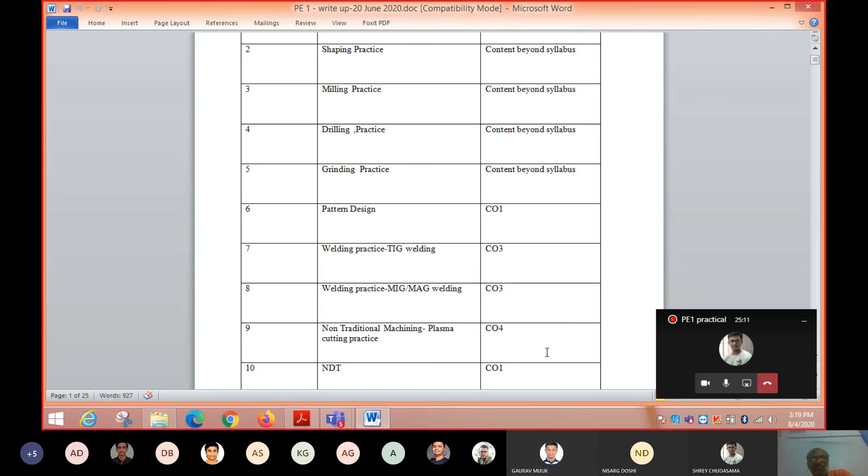In non-traditional machining, we have a plasma cutting machine in our welding shop. They are in good condition. Yesterday only that professor, Fernandez sir, went to that lab, checked, and told us that everything is in good condition. Let's hope, let's wait for the opening of the college. If it doesn't open, we have an alternative.

But at present, we have made it for 5 assignments. I personally made it and given it to all the batches.

On the same line, this write-up, you have to see what happens is the same write-up you will use for writing also. You need not make any other journal pages. Only what you can do is add one cover page, write your name, roll number, batch, subject, and the last one, your teaching faculty or instructor name. In your case it will be my name. So that will be your cover page.

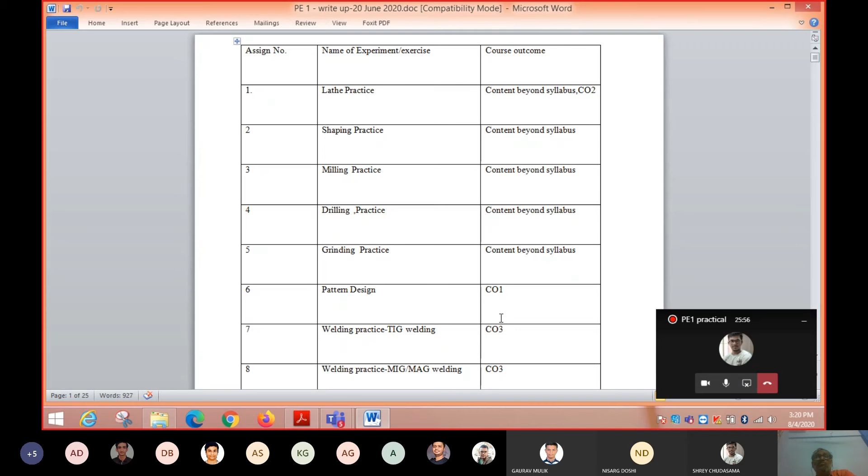Now this is the list of experiments, and then you are starting with lathe machine tool exercise, which is the first one, which we are going to cover extensively today. Now the first question is, label the parts of the below shown center lathe.

Okay, so this is the center lathe, this lathe machine. This is the head stock, tail stock. This is the chuck portion. This is the leg of the machine.

Here you have to write the name in your handwriting. You have to write the name: leg, head stock, like that. This is carriage, you can say this is carriage. Then this is cross slide, which is moving at 90 degrees to the main axis. Then what is this? This is compound rest. This is tool post, it's like that you have to write here. This is tail stock.

Lead screw, feed rod or feed screw, so like that. This is carriage, okay. Then this is the feed unit. This is known as the bed, the lathe bed, like that you can see that.

So now we will show you in our presentation, the write-up is different. This is your journal actually. You have to give directly the names here. You need not draw the lathe machine.

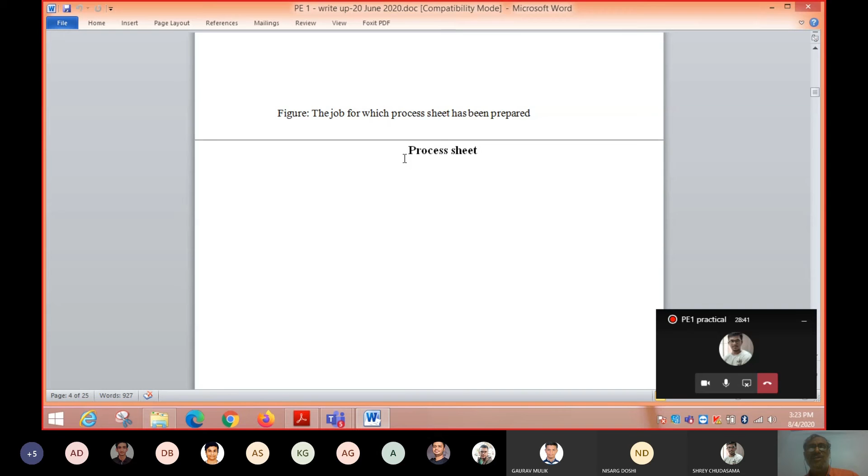All the teachers from all your batches will decide. Then comes part C of the first experiment, that is workshop exercise and demonstration.

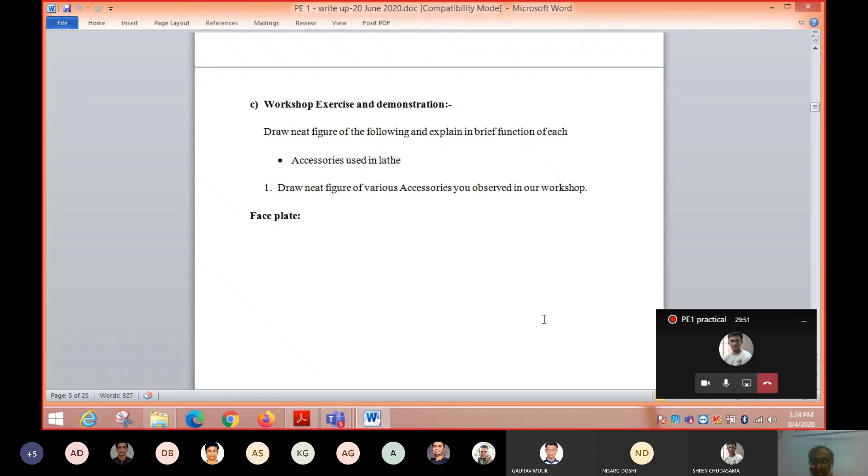Face plate, this is one, you have to draw the figure of face plate here. Draw face plate here, write one or two lines and draw face plate. You need not write the statement, you can directly draw because the space given is according to that figure. So here you draw the figure of face plate.

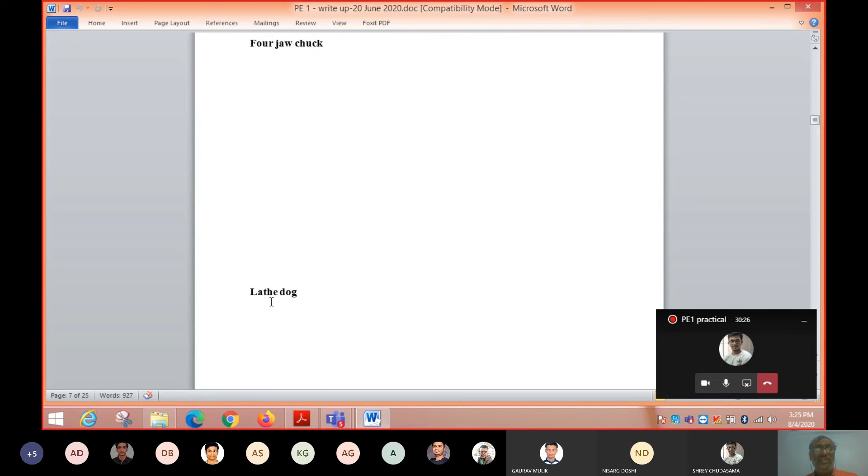Then 3 jaw chuck, here you draw. 4 jaw chuck, here you draw. Lathe dog, this is one clamping element, so here you draw that figure. Steady rest, here you draw, and follower rest, here you draw.

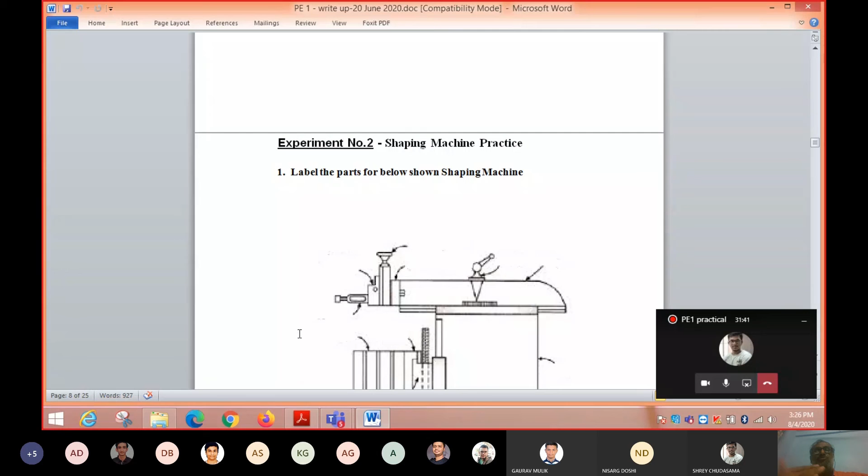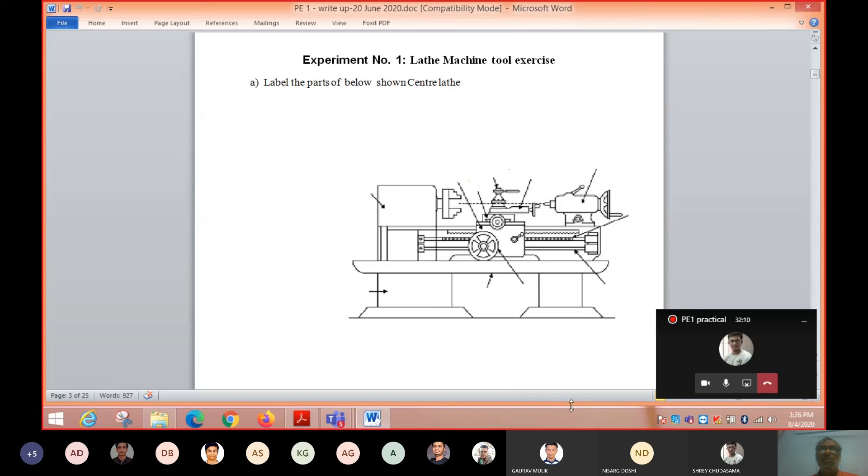तो हम लोग पहले में एक बार फिर से रिपीट करेंगे, आज हम पहले के ऊपर ही कंसंट्रेशन करने वाले हैं। This first experiment is lathe machine tool exercise. We have drawn one figure of lathe front view and you have to just name it, label the important part which is shown by arrow.

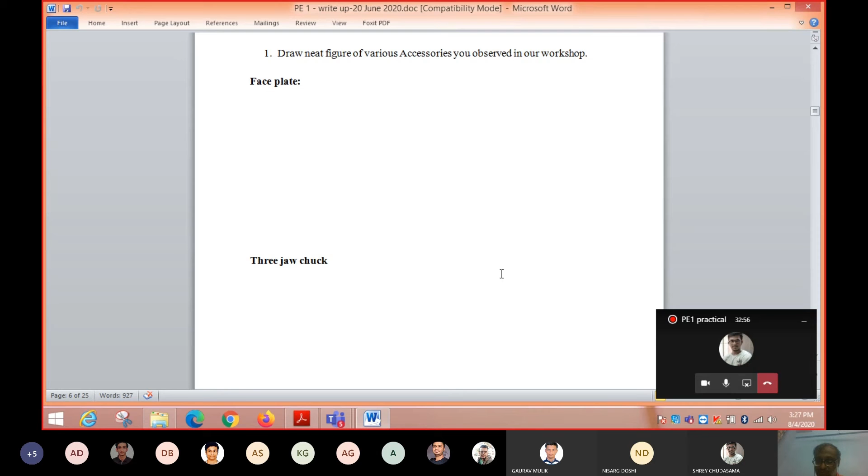Now, just a minute, I will go to my D drive where all the slides I have kept.

The name was presentation 1, machining processes.

Various operations are done on the lathe machine, for example turning. In turning, the job is rotating and the tool is kept in touch with the job, some depth of cut is given, and the tool is given forward motion. As the tool moves forward while the job rotates, due to that relative motion, cutting force is applied by the tool on the workpiece, chips are formed, and the workpiece gets cut.

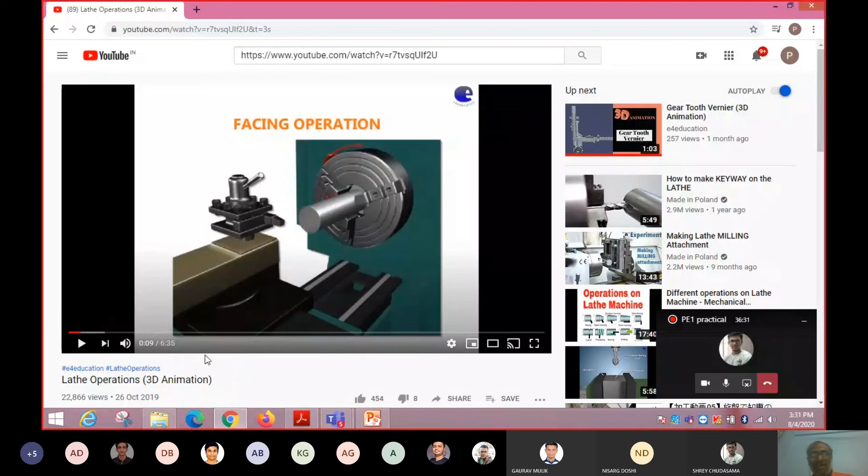You can see this. Now tell me, are you able to see this? Yes sir, but whatever is spoken there, you cannot listen to it. No, that's a YouTube video and they are telling about the machinery, but you cannot hear it. No, I'm just checking. You cannot listen? No, you can only see it, sir. So now, what is this? Let it run through the various operations, I will explain.

Watch this, the various operations. This is the job which is held on the live side. This instrument is known as a chuck, a three-jaw chuck. See how this is rotating.

Now this is the job, clamping on the live side, and this is a tool in the tool post. This is a four-way tool post, called that because it has four sides. This is the cutting tool, and at present it is doing facing operation.

What is it doing? Facing operation. In facing operation, this tool is moved 90 degrees to the workpiece axis. When the workpiece rotates, the tool moves at 90 degrees, and the face is cut, reducing the job's length.

You can see this now. I'll go back. See what is happening, this is facing operation where the length is reduced.

Now we will go to other operations that will further explain. This is the chuck, again this is the job, and this is your tool. Here the description is also written.

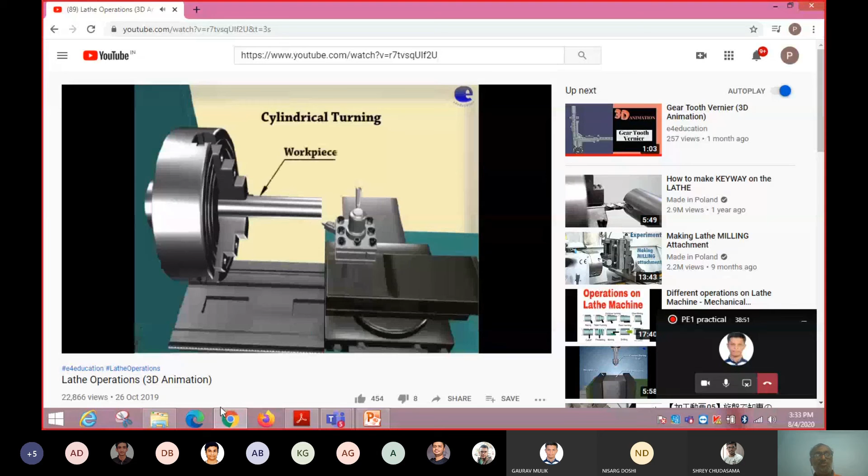See what happens in turning. The feed is given in this direction, the chips are removed, this is turning, and the tool is moving in this direction, with this much depth of cut applied.

So again I will show you. A slight depth of cut is applied, not exactly at the periphery. We will take it a bit forward and rotate it like this, and the job will rotate. So there is a relative motion between this tool and this job: rotary motion of the job and feed motion of the tool.

So turning will take place. What happens in turning is the diameter gets reduced, while in facing the length gets reduced. In turning, diameter gets reduced. So turning and facing are the basic operations of our lathe machine.

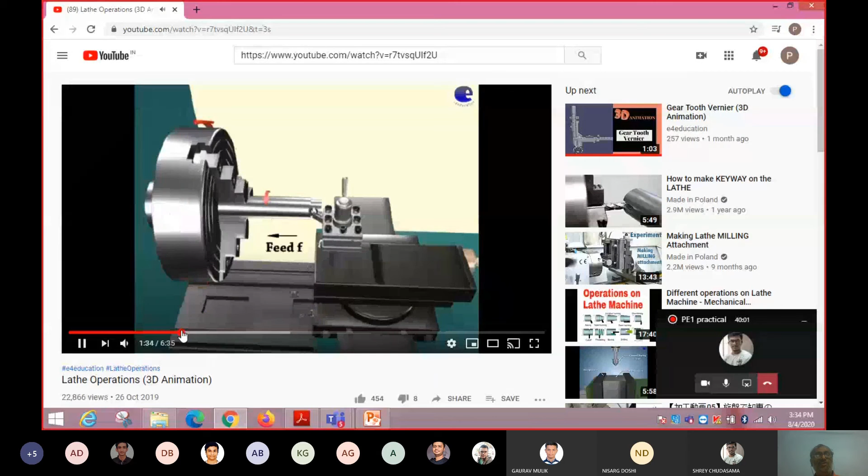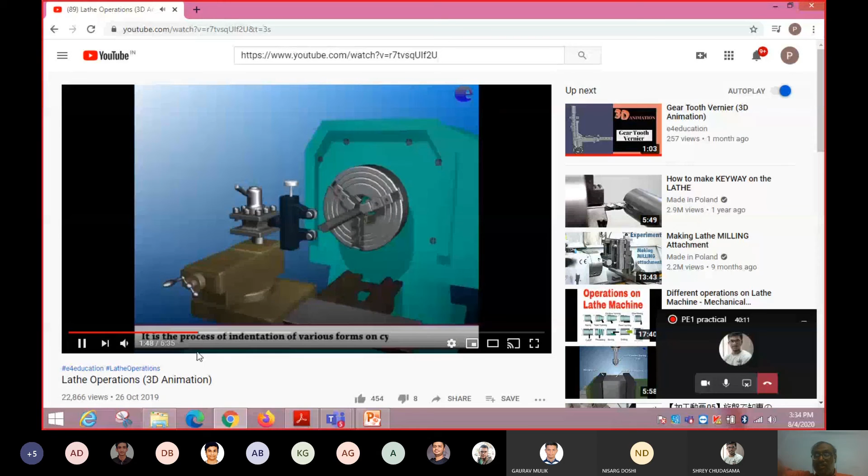Very basic operations. Now other operations. This is knurling operation. Knurling is when, like on dumbbells where for gripping you need a criss-cross structure, that is known as knurling, and that knurling is done here.

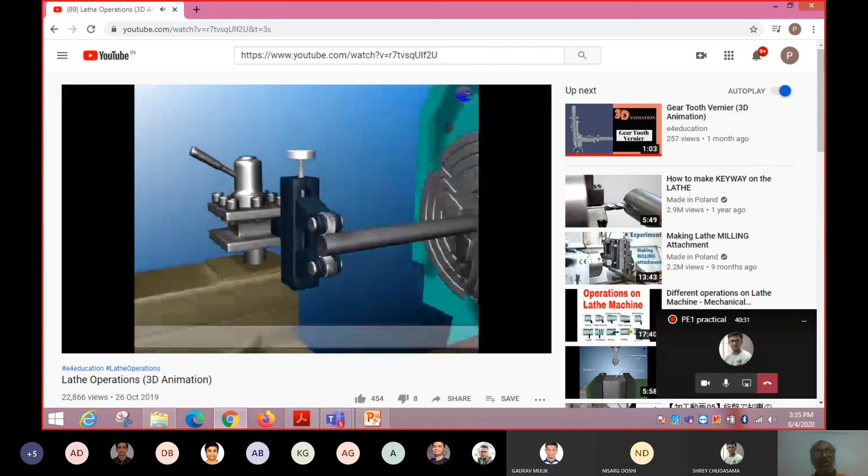Knurling tools are cylindrical with criss-cross patterns, pressed against the periphery of the cylindrical rod, leaving that impression on the workpiece, which is the knurling operation. Later I will specially show you how knurling operation actually works. Some videos here show it schematically, but it's not so prominent.

Whatever impression is here, that criss-cross pattern is now clearly visible. When you apply this, it creates a gripping type surface. This portion is known as knurling. This means if your job has a handle that needs to be gripped, then this knurling operation is done on it. We will go to some other operations ahead.

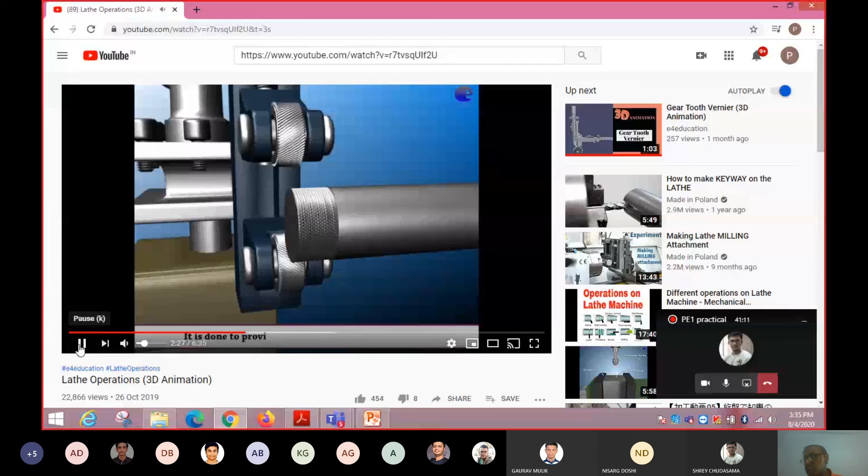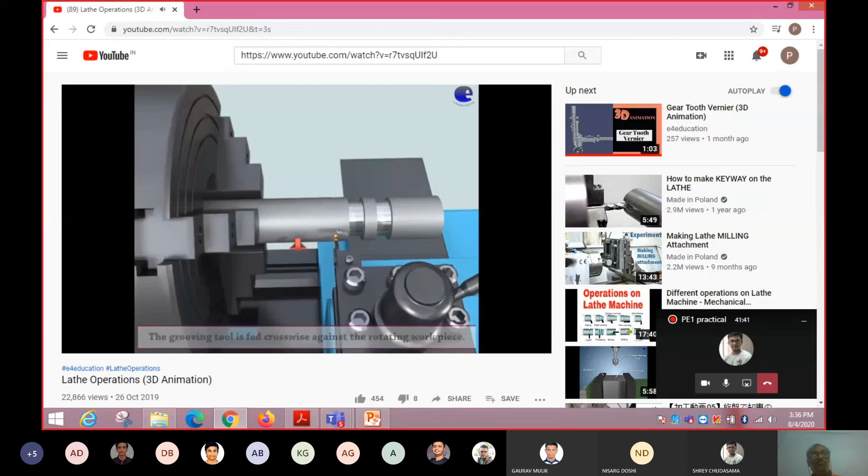Grooving is needed in between, and that groove will be created by a grooving tool. In grooving, much of the area of your tool comes in contact with the workpiece. So you have to keep the rotary speed slightly lesser, otherwise the tool will break, since sudden force will come and more area will be exposed. This is grooving.

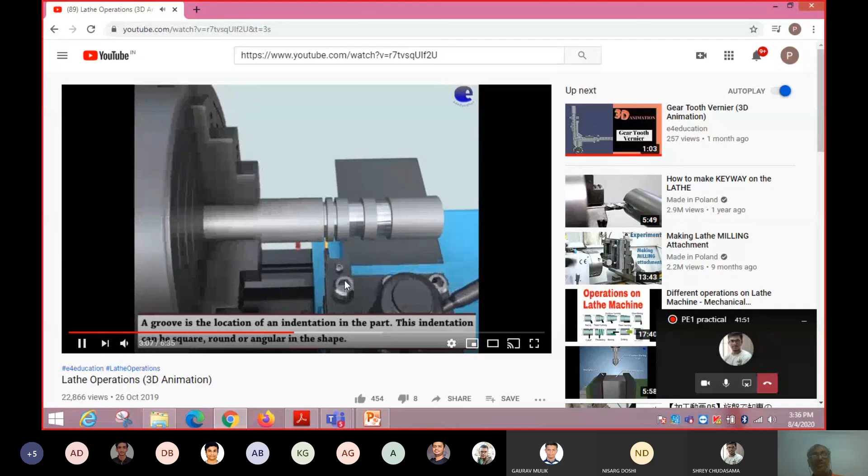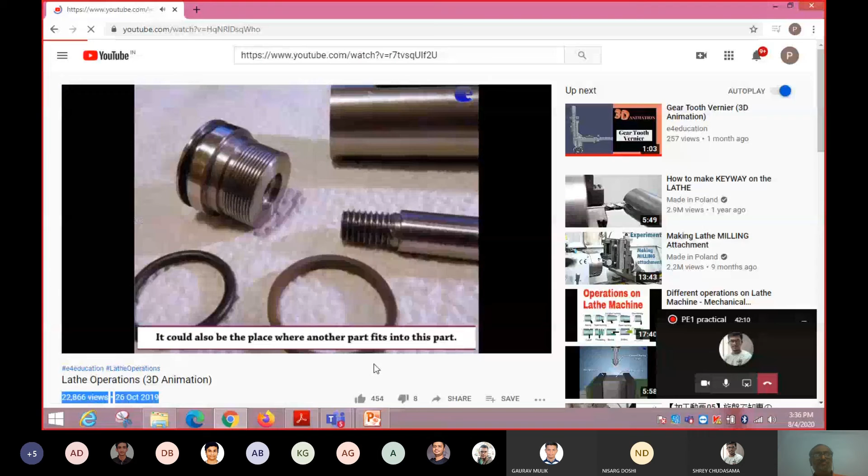Various operations are there that we are observing. Here the function of the groove is also shown. These videos you can see later on also, I am going to give you the slide later on. So this is over.

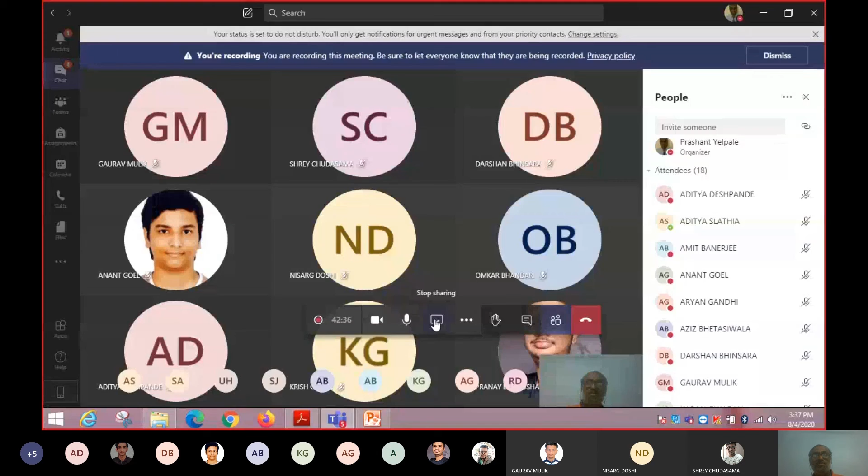So we will show some other now, we were studying this. Are you able to see this? Anybody, full screen or not? Can you able to see this? Now you can see this, no? Yes sir, so this slide we have shown.

Now the same operations what we have studied: facing operation, where the length gets reduced. In turning operation, your diameter gets reduced. Then this is taper turning.

If you want a 30-degree angle, you move the tool at 15 degree using the compound slide. When it is tilted, there are graduations and a protractor there. The zero of the compound slide initially matches the zero of the graduation during parallel turning. But when you turn the compound slide, if you want a 30-degree angle, you turn the compound slide by 15 degree, so the diametrical effect will be 30 degree. The job will rotate as usual, and the tool will move 15 degree in this direction, so you get 30 degree totally. Similarly, whatever angle you want, just half of that you have to turn using the compound slide.

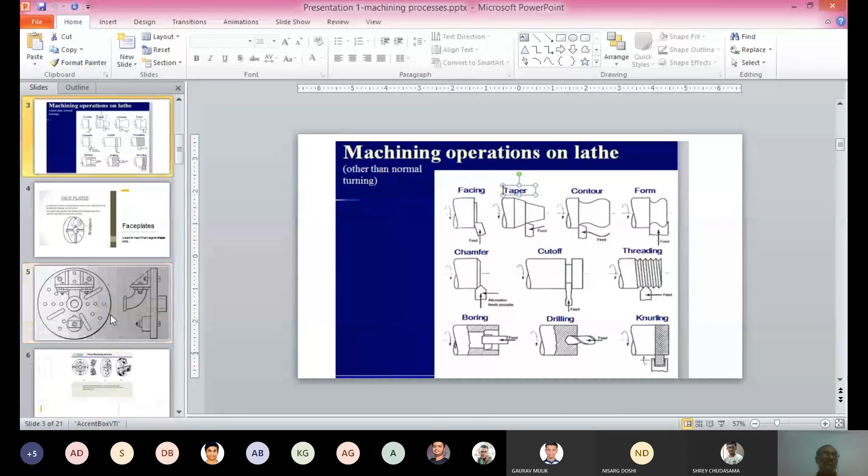Okay, now we will see this faceplate. Just read what is shown here on the faceplate. Instead of chuck we are using faceplate for live center. Aapne three jaw chuck, four jaw chuck dekha hai. Just now in that video there was a three jaw chuck. Now remove the chuck and you can have a faceplate.

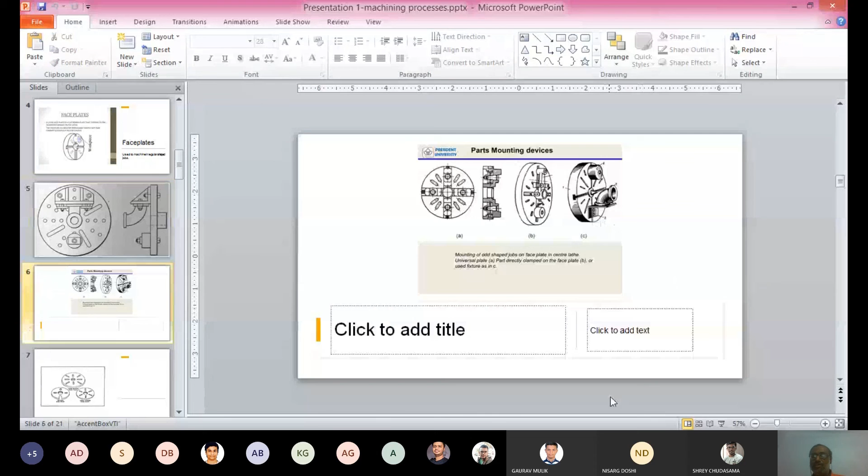You can see here part mounting devices etc. They are shown. Sorry, here I can show slightly - I can make it slightly bigger for you. Oh no, ye bahut hi bada ho gaya. You can see this, thoda sa aur bada karta hoon aapke liye. No, zyada hi bada ho gaya. Haan, ye ab...

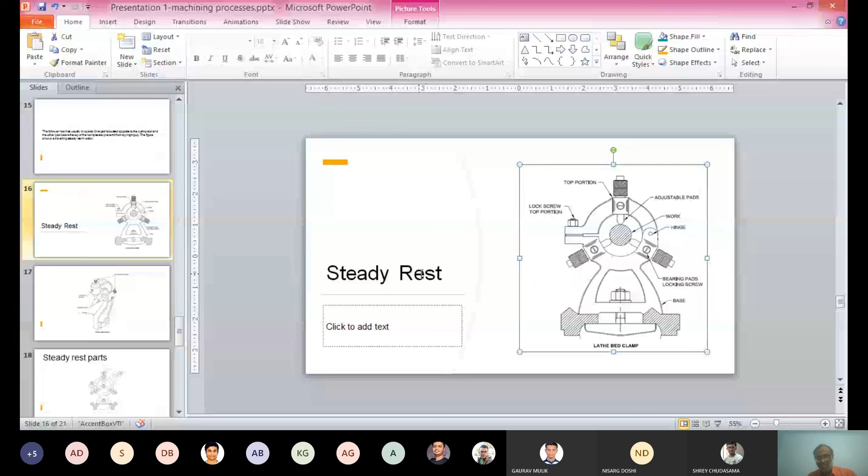If you rotate this, it can move like this, this, this - so it gives good support to your job. So this is steady rest, because it is fixed at one position. However, another one is follower rest. Steady rest and follower rest are used to support long components or long jobs - the bending is reduced, vibration is reduced.

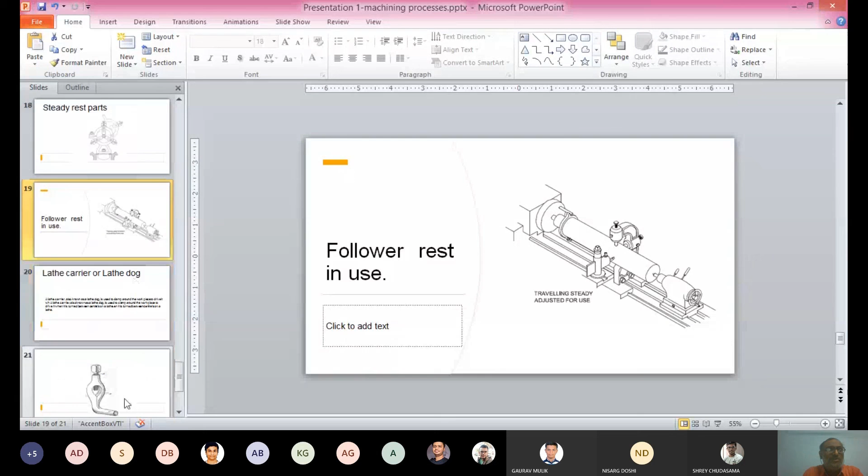So let us see - this is your steady rest, this is follower rest. I have also shown you photos of these.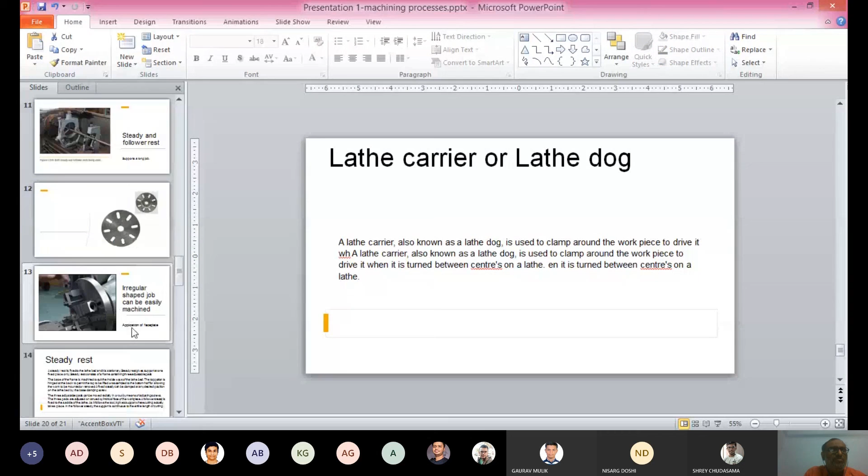Here it's a YouTube search. Let us apply this particular facility - let's see what comes up when we search. Lathe dog in operation - if there is some video, let us see whether it is there.

So, turning between centers with lathe dog - they are showing that.

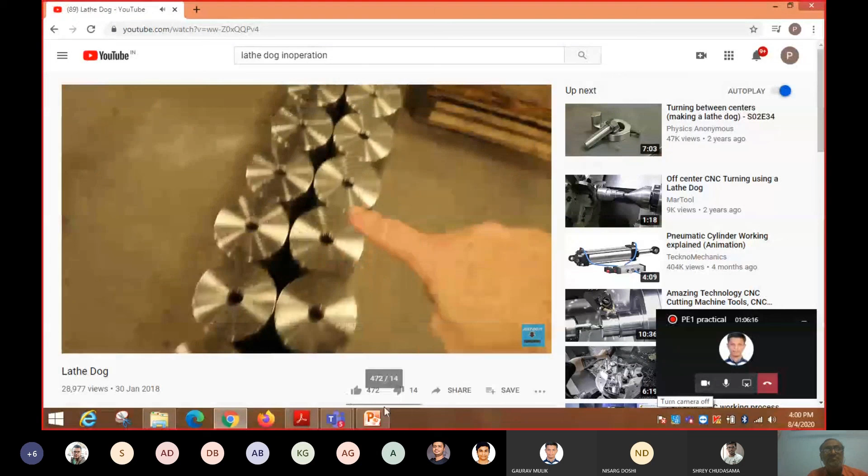See here, lathe dog in operation. So this is a lathe dog, you can see the lathe dog. It is supporting the job, supporting the job, and it is fixed in the machine.

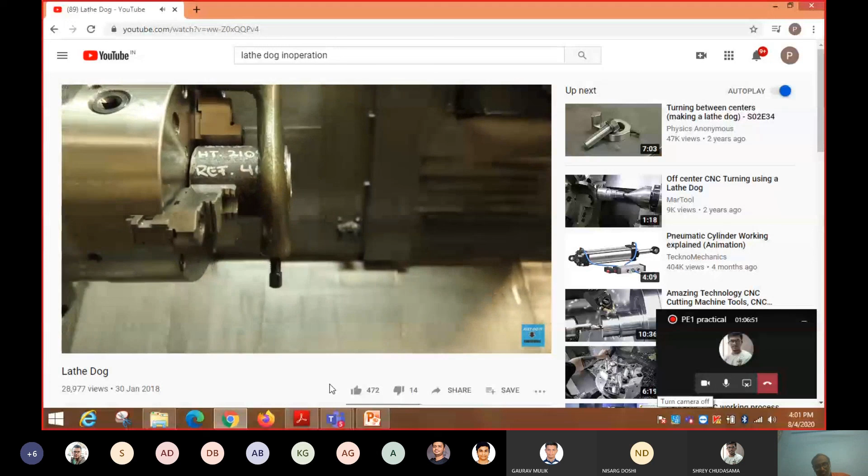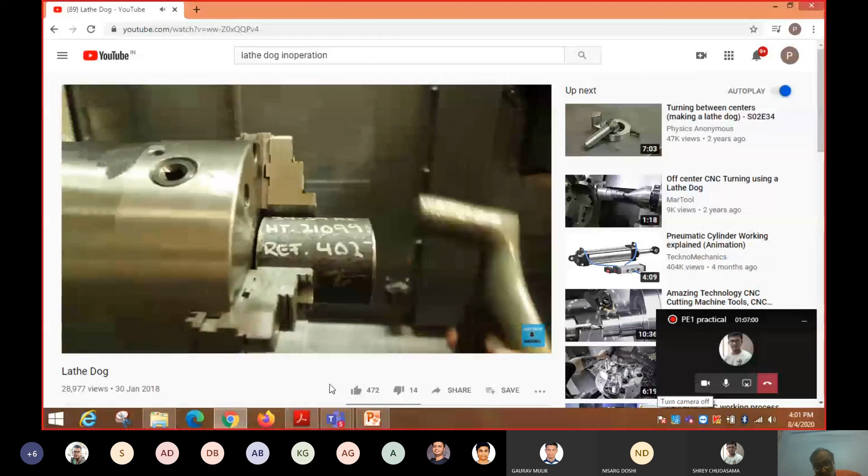Instead of chuck, if there is a faceplate, then in the faceplate hole or slot this portion is fitted, this portion that is fitted in the slot or hole, and this portion holds the workpiece. It's showing very clearly there at the top.

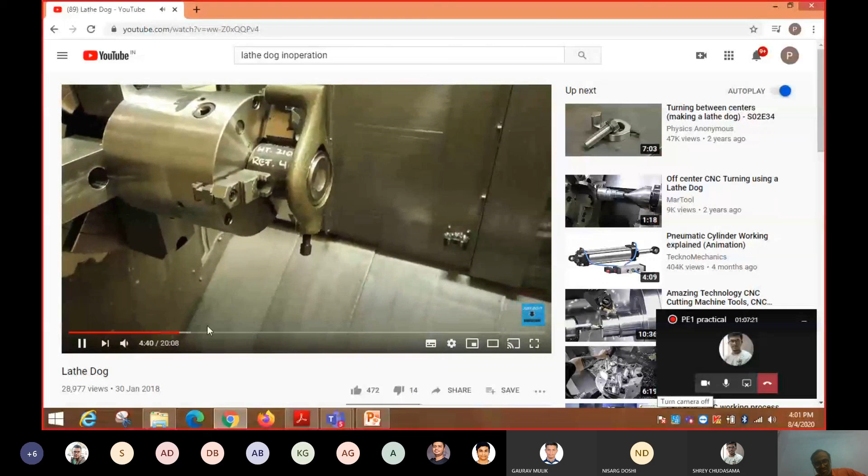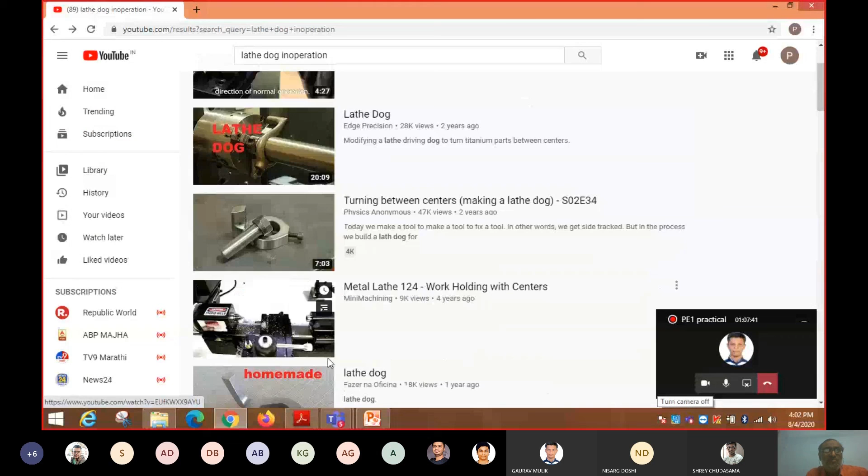What happened suddenly? Net problem. Just searching for the suitable video for you, just a minute.

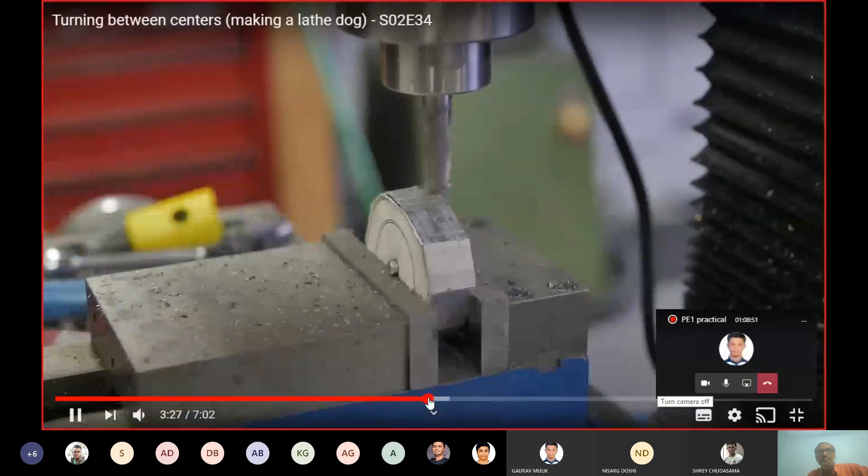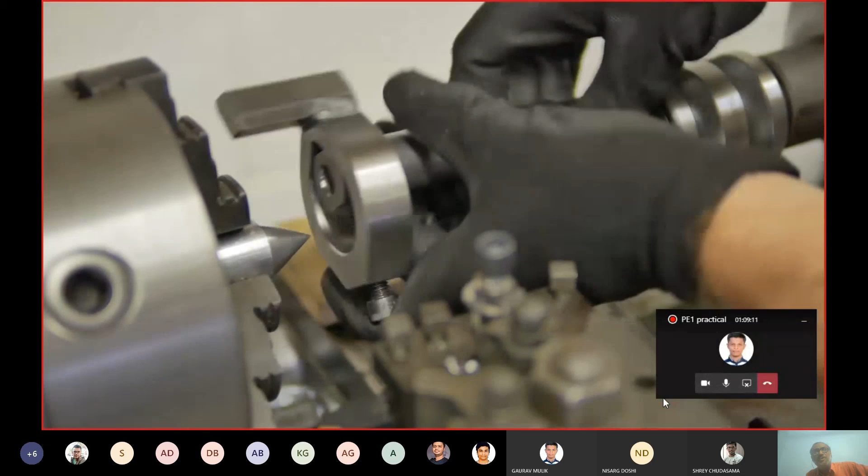They have prepared the lathe dog. So this is that lathe dog, it supports your workpiece.

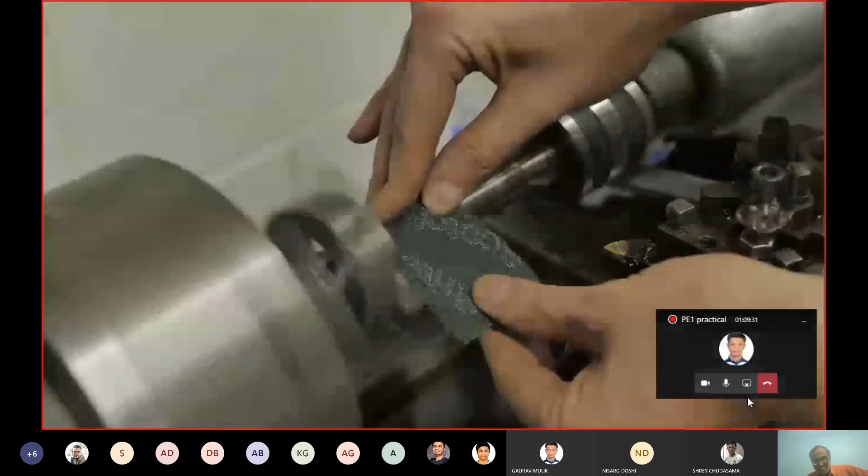So this was about your assignment. I discussed that earlier assignment.

So we will see our regular slides now. So all this steady rest, follow rest, lathe dog. So lathe dog, it is this figure. This portion will go into the face plate, and here this is a portion of the diameter of the workpiece, and here it is for clamping from that side. So this will move here and there as per the job. So this is used to firmly hold the workpiece to the face plate.

For the chuck there is no need, for this the chuck's own force on the job is enough. This is used to hold the workpiece to the face plate. That is more helpful, for that the lathe dog is used. So we have covered lathe dog, then steady rest, follower rest, three jaw chuck, four jaw chuck, and one more I think face plate.

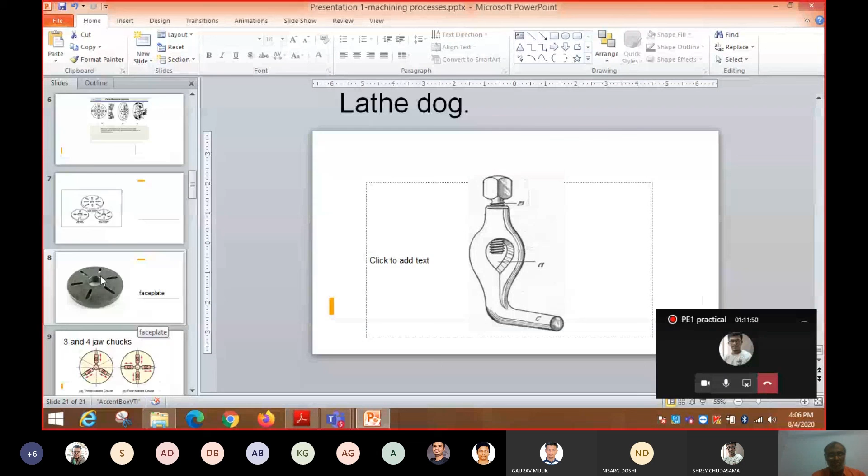Okay, here some more videos are very important that we will see. So here we will see this lathe accessories. Just now we studied lathe accessories. And here is one very good video.

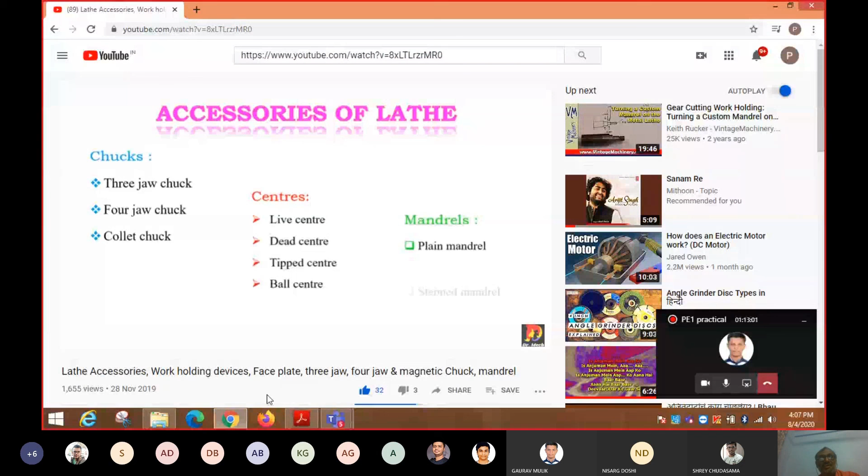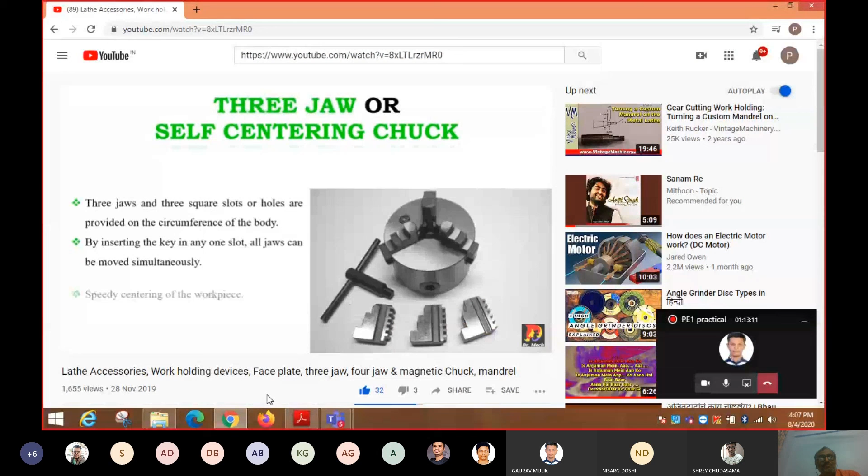Can anybody respond to me, please? Are you watching, boys? Is it visible, no? Yes sir. Good good, this is a very good video, enjoy it.

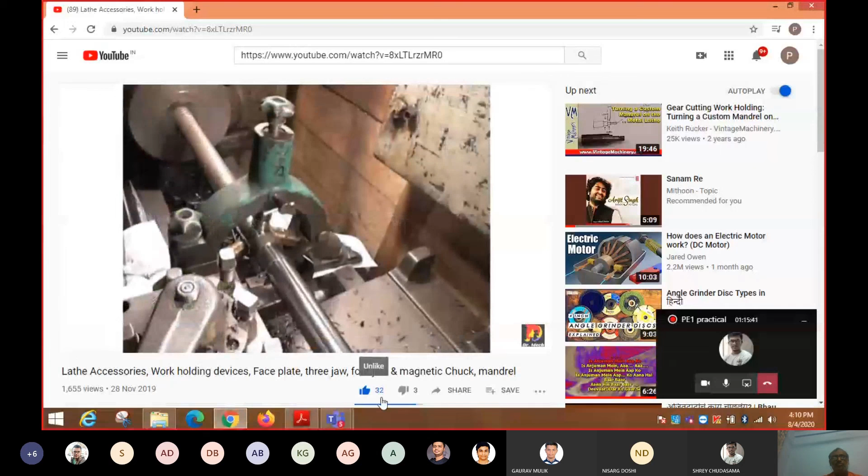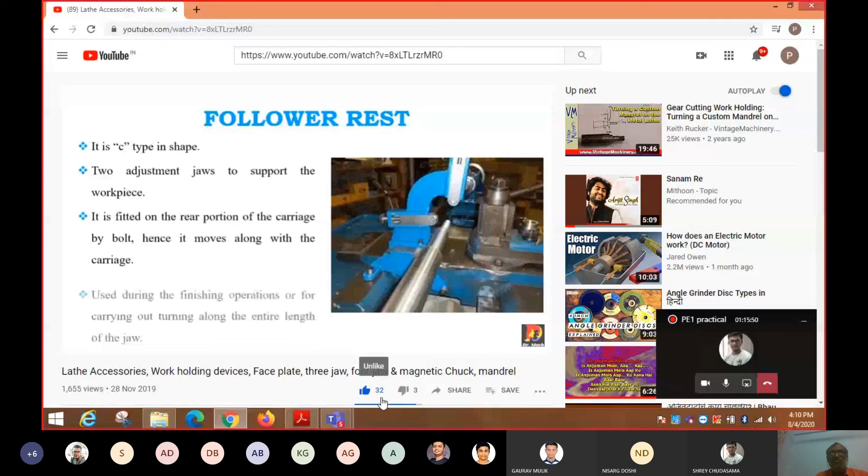Follower rest, it is following the job, this is moving, this can be moved in this direction and give supports. See, this is follow rest, this is support moving in this direction. Mandrels are used to fix the job.